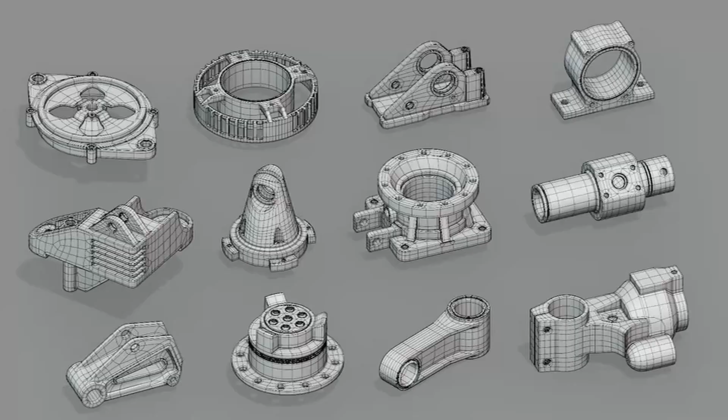The question that naturally arises is, why do beginners think this? Quads are great, and they look super pleasing to the little light collectors in your skull, and tingle the brain just right when everything is nicely and evenly spaced. They're so helpful when doing subdivision modeling, and they're even better for animators. But what they're not great for is performance and optimization. They can balloon your tri count quickly if you're not careful.

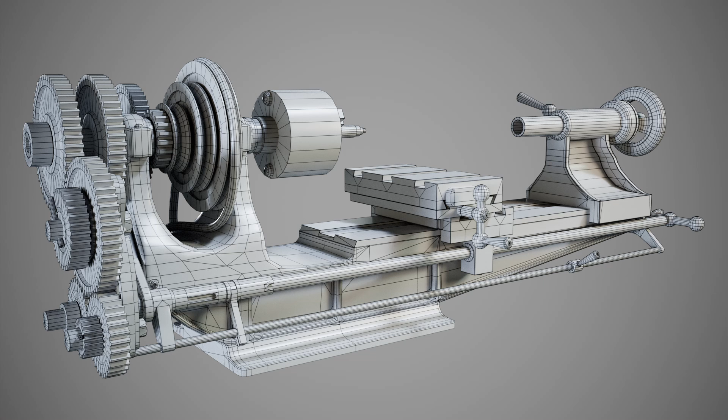Now we get something on the complete opposite end of the spectrum. This is a prop meant to be put in an environment. No deformation, and as you can see, there's tons of triangles all over the place. Is this bad? No, not at all. It's actually probably the best way of going about it.

Another important thing about modeling for games is keeping consistency of mesh density. You don't want a really sparse mesh with random super high density bits and bobs. It's best to keep things at a similar density, and it's good for working with, and it's good in terms of optimization for a game. When working with props, it's also important to start thinking about workflow in how you make them. With characters, it's kind of backwards, where you make a high poly first and retop onto a low poly.

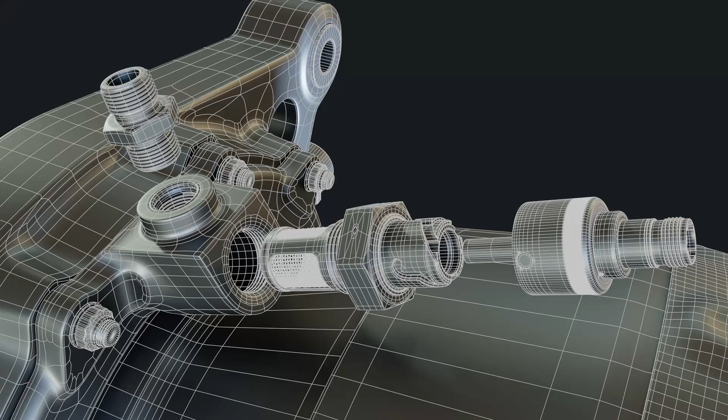With props, there's a whole bunch of ways you can go about making them. Are you doing subdivision? Are you doing a mid poly? Low poly? These all change how you'll be making them and what your final outcome is going to look like for games. Optimizing for time is actually really important as well, especially when you're in a working environment, and subdivision modeling is notoriously slow. You really need to keep an eye out for your topological flow. Sometimes this is extremely important for meshes, sometimes not so much.

Then, we have the real clean optimized mesh. Again, this isn't made to look pretty. It's just another vessel for the real work, the texture. The key misconception here is the whole modeling of this should have been clean, all the way through. But when working with a tight deadline, you can't afford to make everything visually pretty from a technical standpoint.

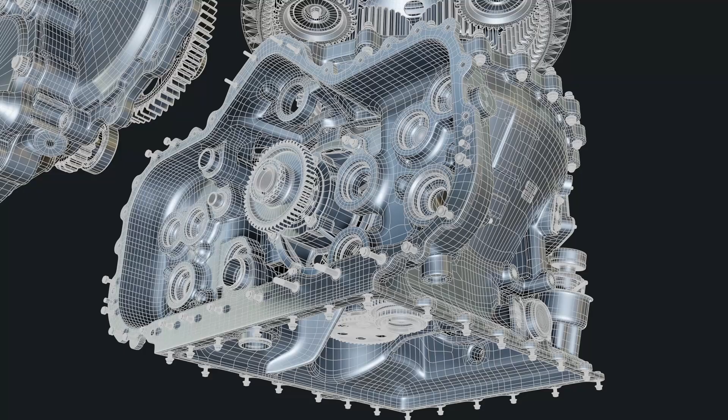This is not the point of 3D modeling, and a lot of time, different types of workflows don't even allow for this. Take for example, ZBrush Dynameshing. There's also tons of counterexamples for this workflow, and different kinds of props that wouldn't work with it. That's the beauty of prop art. You need to be such a versatile and diverse artist to really work with props at a professional level. It's an extremely high skill job.

Now, weapons. Weapons are a complex topic, and it's what I like to make the most. This is my bread and butter. This is where I thrive. I'm a hard surface weapon artist at heart. So here, I do have a good bit of experience, and I can speak with some authority on this.

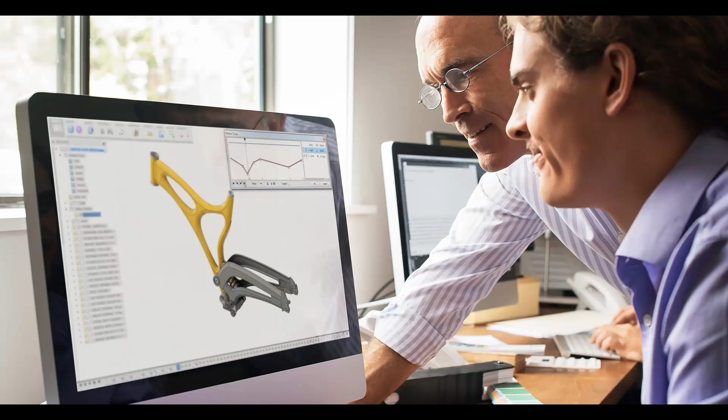There's no single solution to all your problems. No magical tutorial that will teach you when to use quads and triangles appropriately. It's all about taking the time and considering where you can apply things that you've learned.